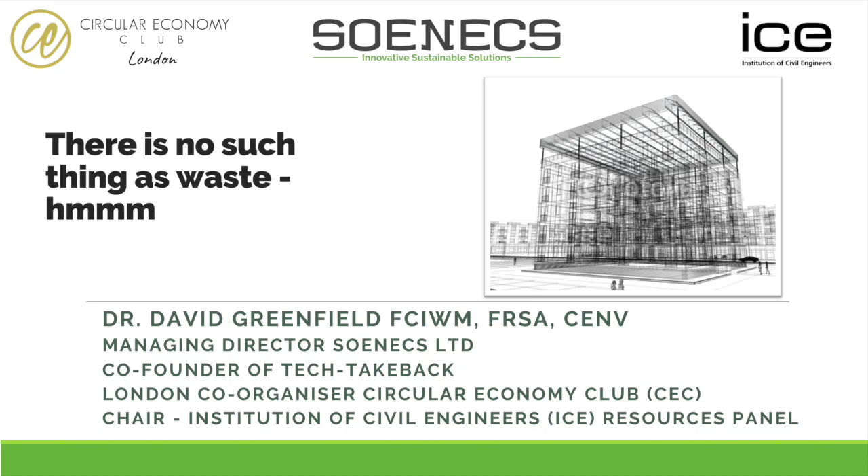A little bit about us. So SOENECS is a research and innovation practice I set up nearly 5 years ago. We have a very diverse portfolio, and many people say I do far too many things, which is very true, but I quite enjoy it that way.

So we're doing everything at the moment from helping churches become multifunctional buildings that will allow the community to come in, to running high-tech national trials using assets that are existing on the road called Pothole Spotter, where we're getting high-definition cameras, trying to understand how the road surface deteriorates so we can prevent potholes.

Kat's already mentioned Tech Take Back. We've also done quite a bit in London, particularly in relation to planning and working with the likes of London Waste Recycling Board to try and understand how developers can actually put in place facilities for collecting recycling during the operational lifetime of the infrastructure.

I'm also down as the Circular Economy Club. Some of you will know about Circular Economy Club. If you don't, please have a look at the Circular Economy Club. We've got 157 cities now that have their own local Circular Economy Club, and it's a free-to-join membership organisation for people that are interested in circular economy. I'm a mentor and now responsible for Europe, which is going to be quite interesting with Brexit.

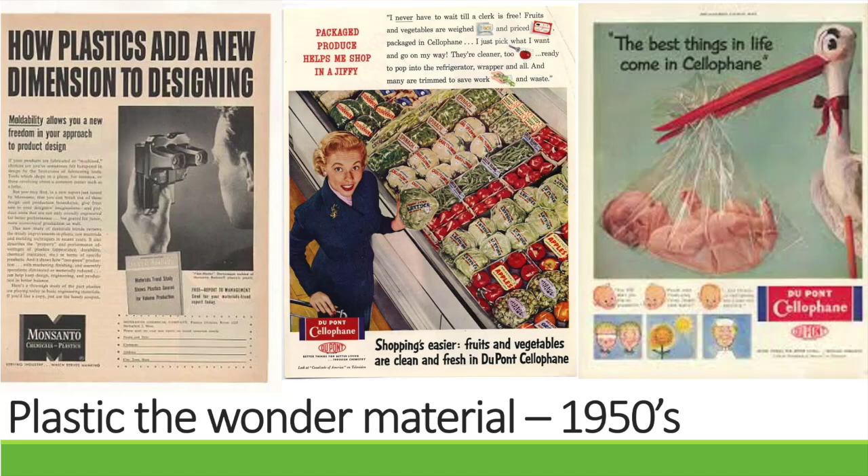1950s, the first packaging of food in our supermarkets. I don't think you'd get away with a baby in cellophane anymore, but it was a wonder material. And fast forward to 2017, and plastics are now seen as the devil's material.

This is how quickly things can change, and for me, a waste is a byproduct of somebody not understanding the materials. And when we're talking about construction, we've got some of the biggest challenges that this planet has ever seen. So we're looking at how do we create sustainable cities? How do we design new buildings and new infrastructure with a view to understanding how to not make it waste, but also have an understanding of the materials?

Currently, Kat's already mentioned this. Half of the waste that we create in the UK is from construction, demolition and excavation. That's approximately, and I say approximately because as a bit of a data nerd, there is not enough good information on tonnages out there in relation to construction and demolition. There's approximately 100 million tonnes of construction, demolition and excavation waste arising. Now that's variable, and that is variable down to big scale projects like HS2, Crossrail, which produce huge amounts of excavated waste in particular.

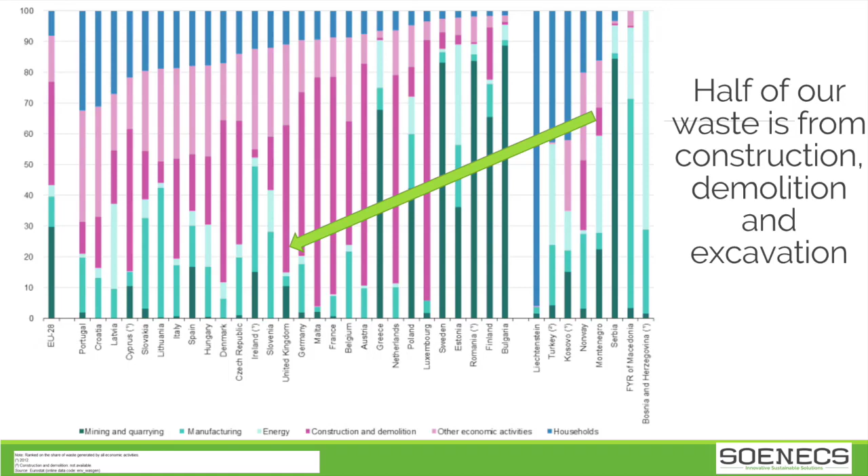And this is a topic that we discussed with the Chief Scientific Adviser report 2 years ago that was published by government. There's a particular chapter called Construction and Demolition where we explored some of the challenges around construction, demolition and excavation waste, but also some of the solutions. This was published, it sort of slipped out just before Christmas, so nobody really noticed it.

But it's a very comprehensive overview of a number of challenges around waste management across all the sectors. And I'm looking around the audience and seeing a couple of authors of different chapters here. So it was written by experts rather than written by politicians. There might be a link.

And in the construction sector, what we have is a huge challenge coming ahead. We know that the population of the world is growing, and we have to look at this on a global scale. And if the population is growing, then the urban population is growing, and that means that we're going to end up with significantly more construction and potentially significantly more waste.

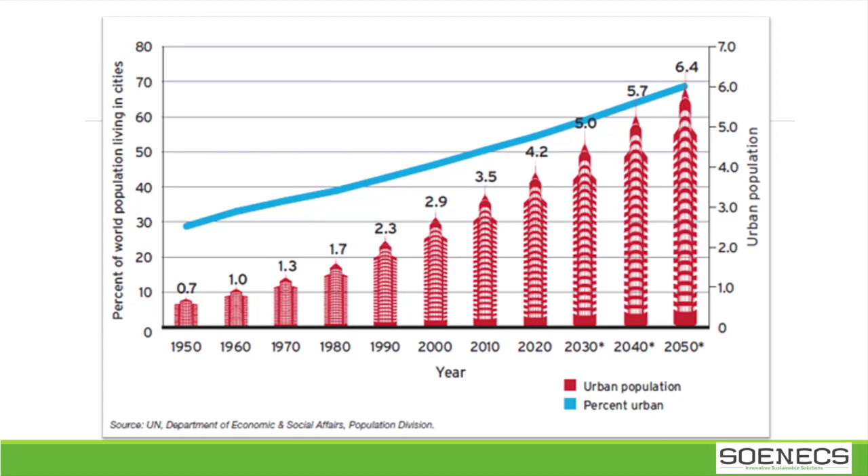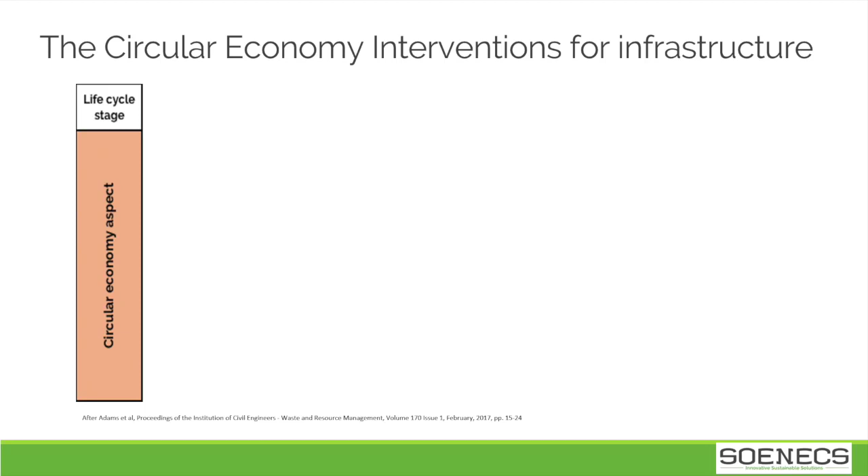And that's where building a circular economy comes in. And for me, one of the things that I'm also doing is working with the Institution of Civil Engineers, where I chair the resources panel. And we've been looking at the life cycle of infrastructure.

And for me, there's 5 key areas. There's the design phase, the manufacture phase, the construction phase, the in-use phase, and the end-of-life, second life phase. And for us to think about how we manage wastes in the construction sector, we need to start thinking about these 5 stages, but also the interventions that could avoid waste being created.

Because actually most waste is created as a result of not thinking properly about how something's designed. Last century, I did my dissertation at university on construction waste, and I went and sat on the side of a landfill site in East Sussex for a week in November, watching construction waste coming out the back of a bin lorry. It was quite cold, but it was very exciting.

But it set into my mind that we were actually throwing away perfectly good materials. And as Kat's slide showed, what is defined as waste is sometimes very negligible and down to quality standards that might be a little bit tight, let's say.

So there's a whole raft of people talking about how do we design out waste, and we've got some really interesting construction and architectural tools that are starting to be looked at. For me, if any of you are designers, architects, constructors, or in facilities management, it's no good just knowing about your own particular strata. You have to understand the whole life, because what we've done over the last 50 or 60 years is build to construct and then think about how the building is used in many cases.

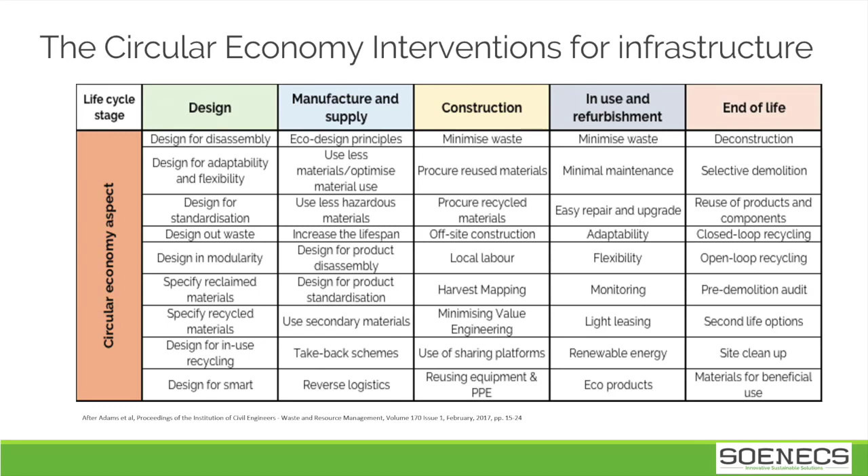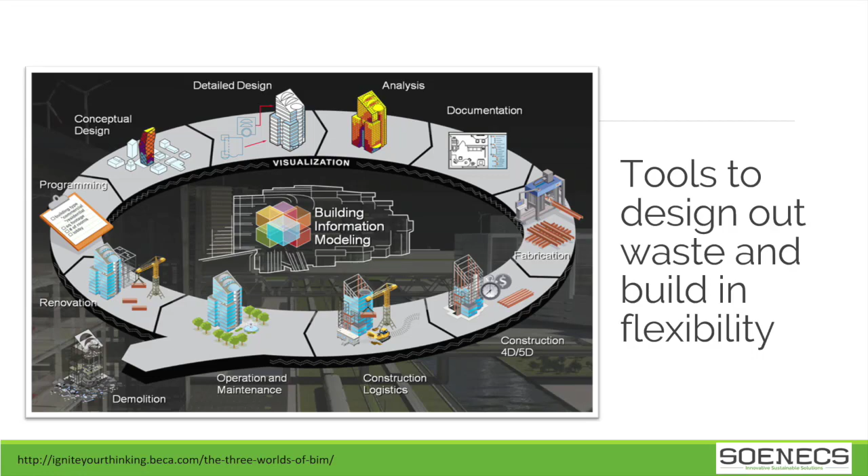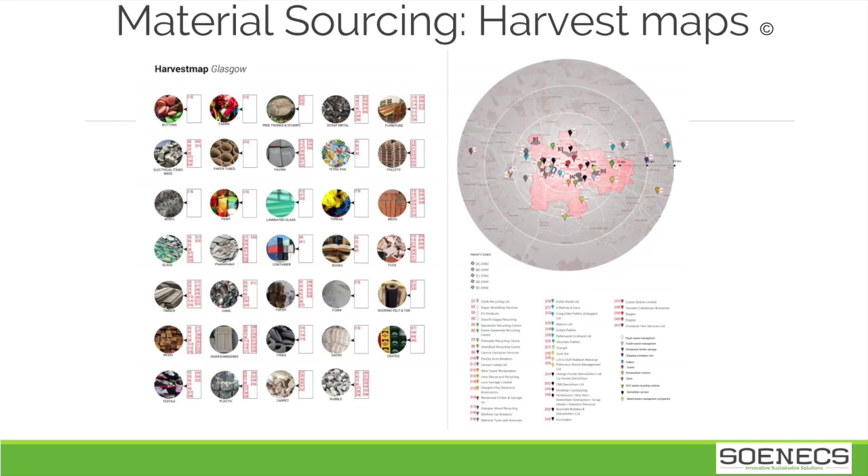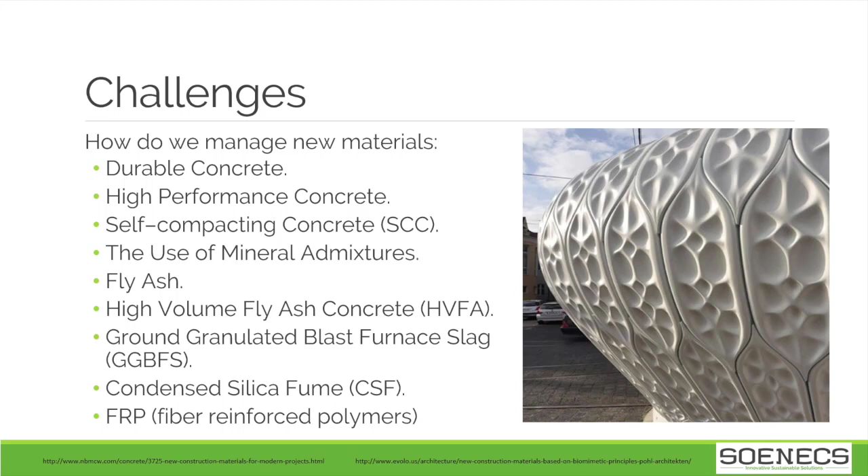We're starting to see some 3D printing - these are all 3D printed. What happens to the waste at the end of the lifetime? Good question. And that is actually, I think, for us, one of our challenges. The new materials that we're creating - have we thought about what happens to them at the end of their life? I'm going to leave you with one consideration.

I've had a Portuguese delegation and a Kenyan delegation the last week that I've been working with, and all of them have said, we're talking too much English, we're not talking international. So this is a matrix that I created about 5 years ago that's published. As an academic, we always like to have something published - how I got it through, oh no, I was the editor. The international language of the emoji.

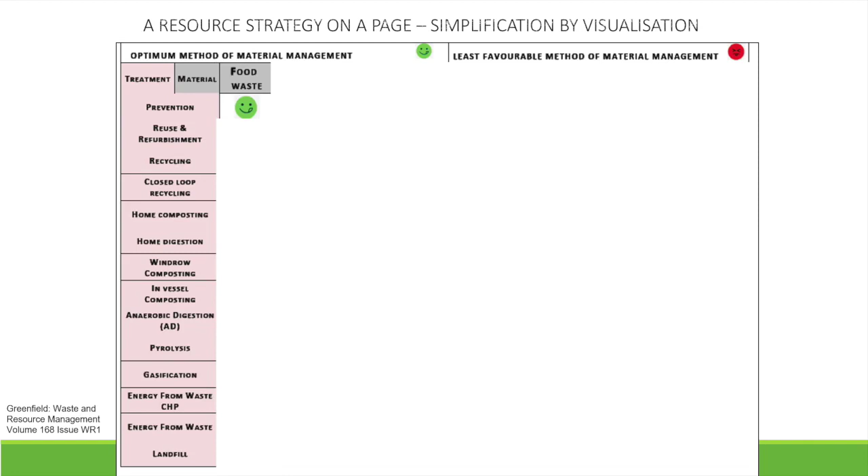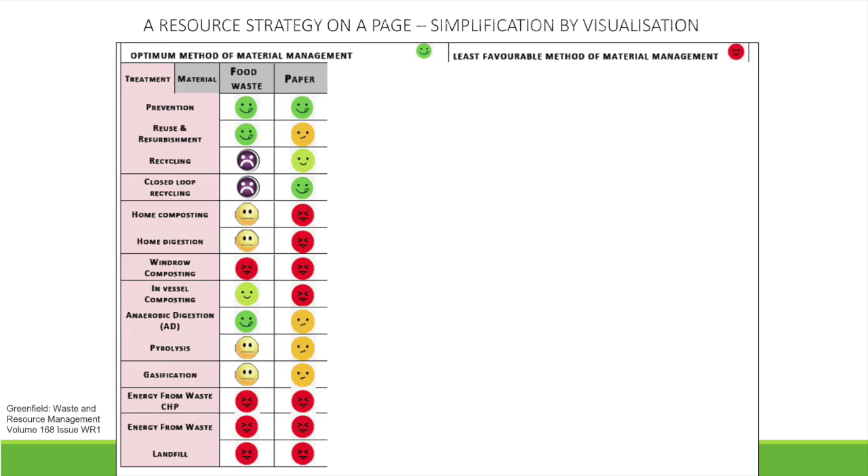We need to think about materials, how they're used, and what's best for them. So this is for household waste, materials along the top, treatment methodologies down the side, and the best way of managing that material. Are there any councillors here? Local authority councillors? No, good. I designed this for local authority councillors because they've got about 30 seconds to get it, and it does it in a simple way. People understand what an emoji is.

A big green smiley is the way of managing that material. But what's really important, and the reason why I've got it on a material by material basis, is that different materials have different ways of being treated based on their properties. And that's what we need to think about when we're talking about waste - we need to think about their individual properties and understand how best to manage them. Thank you very much.